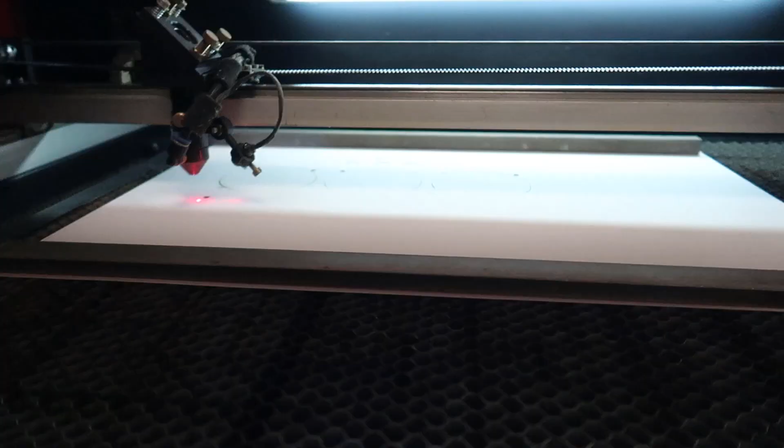On this episode of For Fun Flyer, the installation of the old and designing and test cutting of new cockpit panels, doing some investigation and changing the wingtip lights to LEDs.

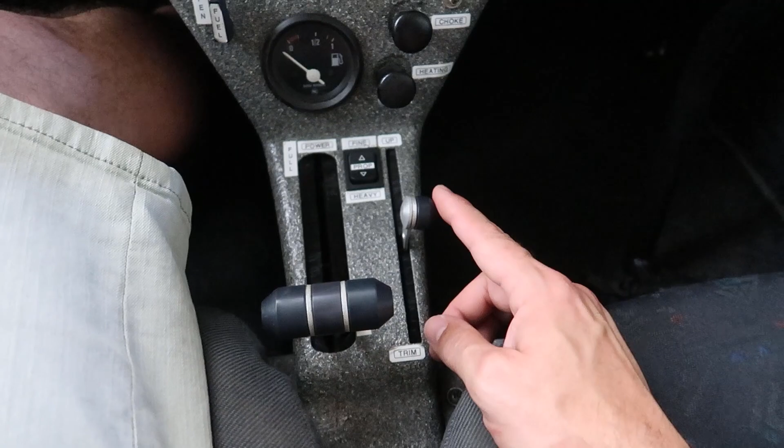And over here you have the lower section of the middle console with of course the throttle, the elevator trim, the prop pitch adjustment switch. But since the original variable prop is replaced by a fixed pitch propeller, it's no use anymore. So I'll have to figure out what I'll do with this spot inside the midsection. And you've got the choke and the control for the heating. Well, that's basically it.

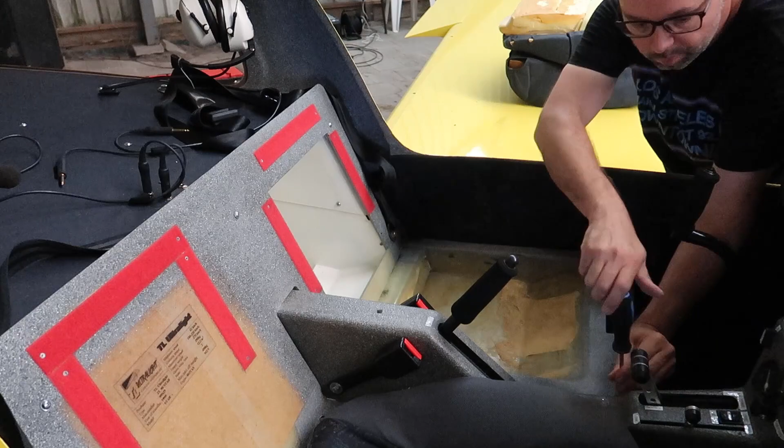So I removed the seating and the back seat. I always wondered where the high voltage part of the strobe and navigation lights were tucked away in this plane. But now I know. So I'll replace my lights with LED. So this all can go.

And what I'm actually looking for is a way to get inside to the headset connectors, because I purchased two A20 Bose headsets and they don't work, but that all has to do with how the headset connector in the chassis is connected. So I uninstalled the headset connectors from the chassis of the plane, and it's just as I suspected. They wired via a little wire bridge, let me show you on the connector, the ring with the tip of the connector.

So this is called the sleeve, this is called the ring, and this is called the tip. And with a stereo headphone jack, that doesn't matter, right? So if you connect it to either that one or that one, if it's a mono headset, it will work. But I got just the standard GA mono connector. And when this is connected with this, with a mono connector, the ring isn't there. So it's connected to the ground.

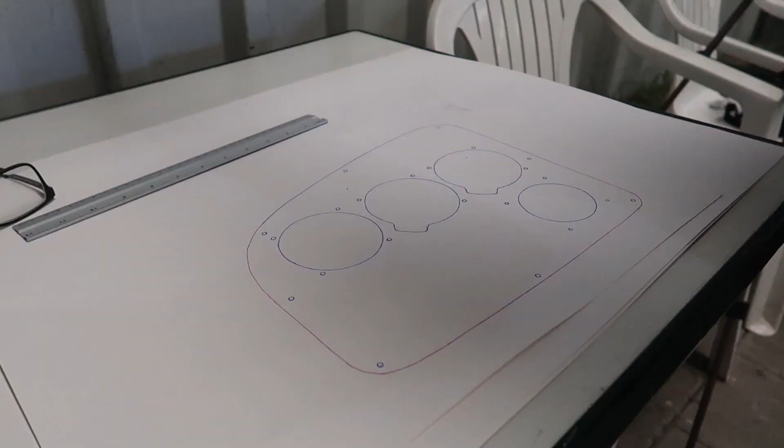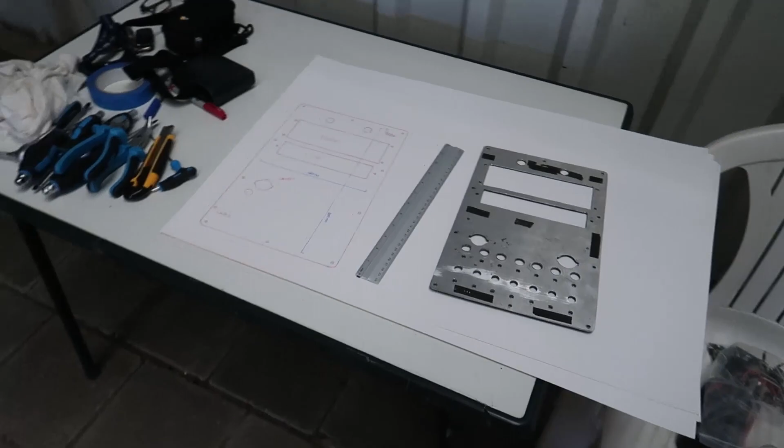So this is the piece and these are the traces. So now I have a nice flat drawing of the shape of the cockpit panel. So the next step is to scan it into a computer to vectorize it. The whole setup of the new panel will be different, but I have at least the shapes that worked in the previous original setup. So let's do the rest of them and see how that evolves.

So another day and another step in the process of making some new cockpit panels. So the couple of first steps you witnessed inside the hangar. I traced the old panels onto a piece of paper. I've scanned those drawings on my business copier and scanner. And after that, I'll walk you through a couple of steps of the complete process.

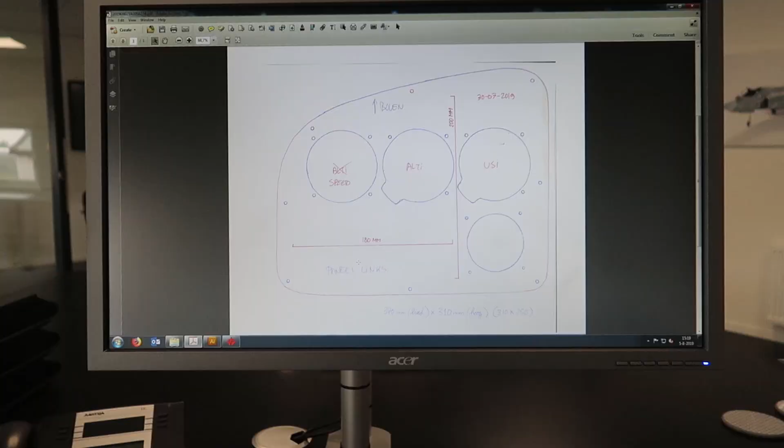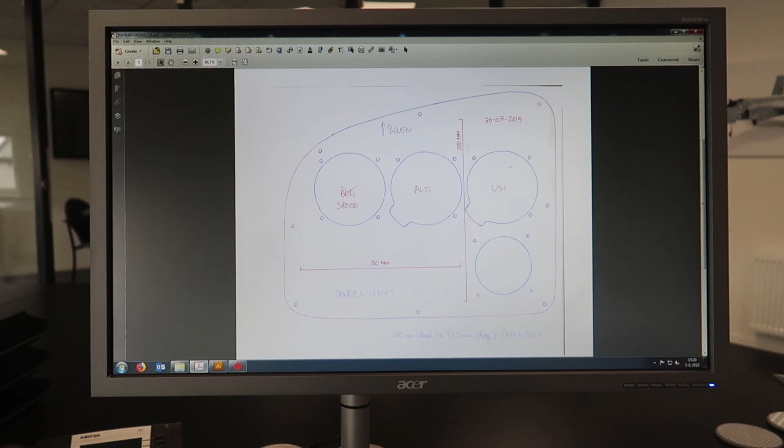So the first thing I did after I scanned the shapes of the cockpit panels, after I traced them onto a piece of paper, was check the scale of the scans. So I drew a line in the real life scenario with a certain measurement to it, to check if on both the X and the Y axis the scan was exactly to scale. So that is corrected in this PDF.

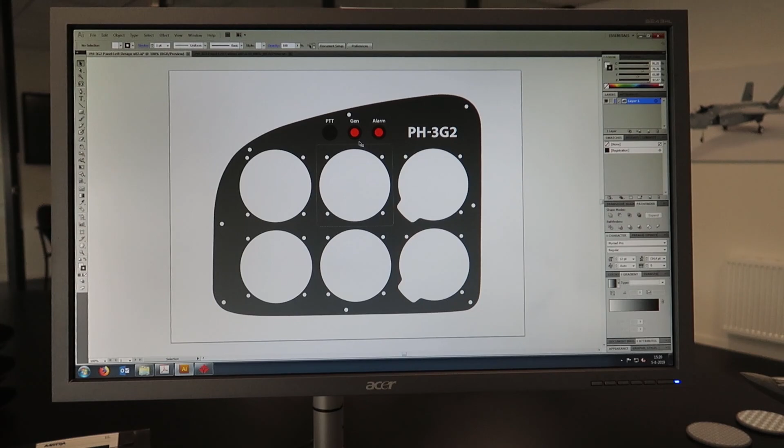After that I traced the PDF into a vector type of drawing, and as you can see here I did some GUI designing of all the buttons and instruments where they should be put on the new panels, etc. So well, I was pretty satisfied about this setup.

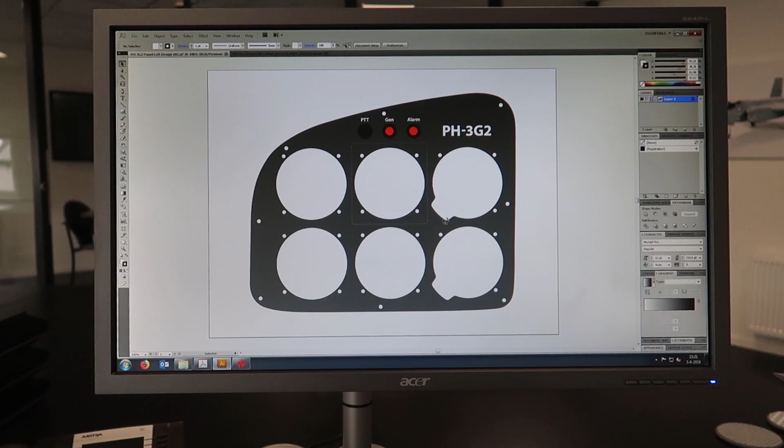Here we'll have the speed indicator, the Garmin G5 EFIS, altimeter, vertical speed indicator, an info device. I'll tell you more about that instrument later on. And here we've got a slip indicator. So it's not your completely standard six-pack, but pretty close to it.

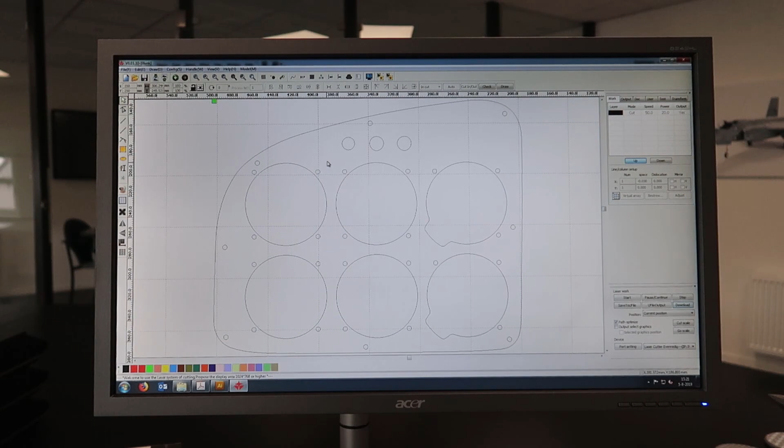And the next step after that is to just leave the trace, which is ready to be cut out of carbon sheet. But I'll first make a couple of test pieces on some cardboard so I can physically test the shape and geometry in the airplane. So that's up next. If you're wondering exactly where I'm going to cut out the test shapes of the cockpit panels,

At which company that will be? Well, that will be my own company. I'm a small business owner and I'm an engineer of all sorts, so I do software engineering, electronics engineering, prototyping, product design, etc. So I've got a couple of sophisticated machines where I can do some prototyping, and one of those machines is actually a laser cutter. Well, let me just show you.

It's way better. So welcome to my little maker space, and here's the machine I just spoke about. It's a 60 watt CO2 laser cutter, and it allows me to cut on most materials up to about half an inch of acrylic. Watch this.

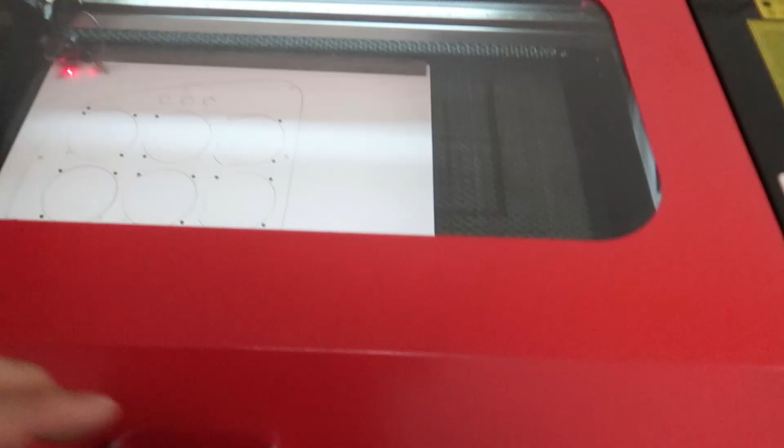Pretty awesome, huh? This never gets old. Seeing something getting cut out of some sort of material via laser cutter is just always fun. So when the smoke clears from the laser cutter, I can access the part I just cut out, and as you can see, it's just really thin paper, or thick paper and thin cardboard, and there you have it. The shape I just drew in the computer, and this will be the exact shape and dimension of the definitive cockpit panel. So that's pretty awesome.

Since I switched on the laser cutter, I decided to cut out the adapter plates for my LED wingtips too. So the wingtip lights that are on my airplane right now are from Whelen, if I pronounce it correctly, and I'll replace those for some LED lights of Aveo Lights. It's a small Polish company that produces outstanding wingtip and other aircraft lights in LED, with a huge variety of lights. And so I have to make an adapter plate to fit on the holes and the space on my wingtip as the lights I have right now. And they have to be able to house the new lights on them. So I'll show you in a couple of seconds what the shape looks like.

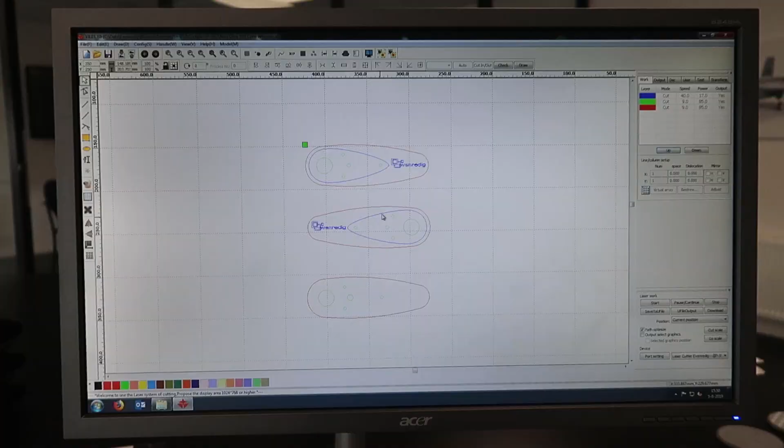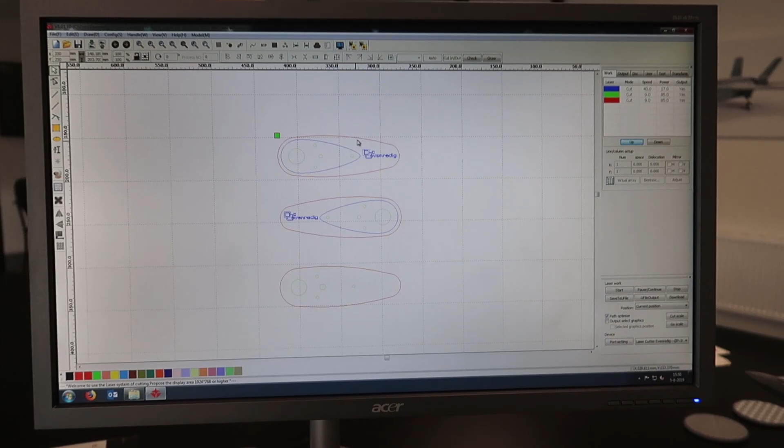So here you have it, the shape of the adapter plate. The red outline is the outline of the adapter plate. The blue line right here is the shape of the new LED lights, and these are some mounting holes and wire holes for the LED lights. So basically this light will attach to this plate, and that will attach to the whole wingtip and cover the complete surface of the original lights that are on my airplane right now.

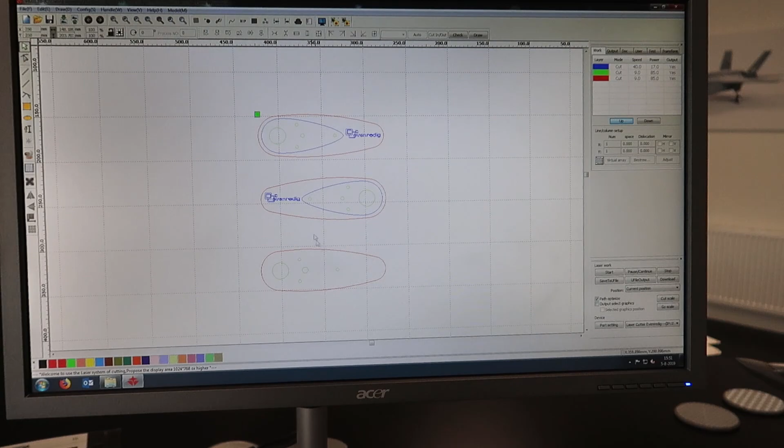And it will be a sandwich of two layers. So this is the top layer, this is the bottom layer holding the nut, the mounting nut for the new LED lights. So I'll make two of those and one separate of those, because my company logo has to be readable, right? So that's why I split the designs of those two. So, well, let's throw it onto the laser cutter and see what comes out.

So for the adapter plates for my LED lights, I use acrylic, as I said before, because I can laser cut it myself. And I've got this acrylic, I don't know if the camera is showing right now, but it's reflective. It's a silverish kind of plastic, which allows a better reflection of the light that will be emitted by the LED lights on the wingtips. So I think it's a perfect candidate for this application. I think I can squeeze out two complete sets. So let's see how that works out.

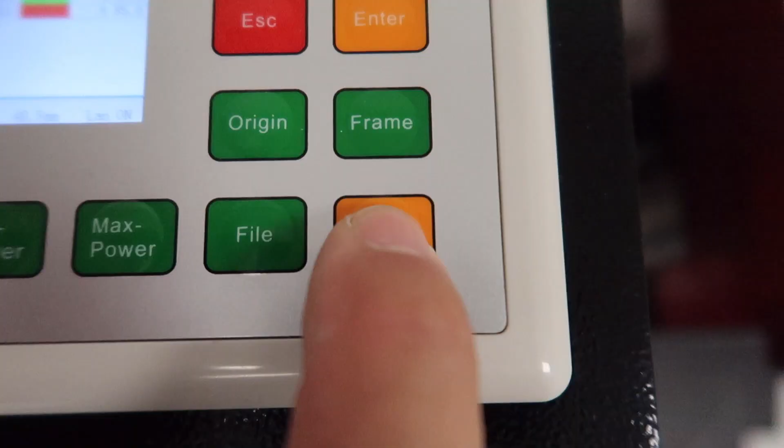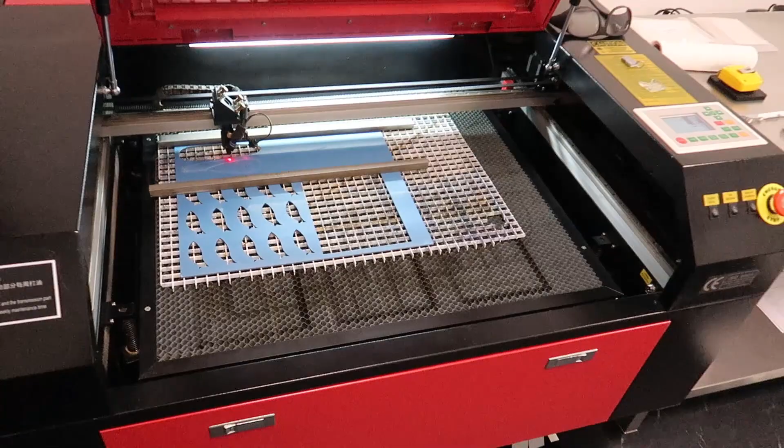So the laser cutting is finished. I've got some parts laying on my desk right now, the paper cutouts as I showed you in a video previously, and I made the adapter plates for my LED lights. So as I showed you on the drawing, this is the part where the new LED lights will be screwed on, and this complete sandwich is glued together. So let me show you right here.

It's a sandwich of 2 layers of acrylic, and that's because the new LED light is connected via this hole in the middle right here. And if I show you the back side of it, you'll see the cutout hexagonal shape for the nut. So the nut will be glued in here as well. So once this plate is installed on the wingtip, you can just screw and unscrew the LED lights with a nice M5 metric 5mm bolt. So that's basically how this is developed. So all I have to do right now is to glue those parts together, and I've got a complete adapter plate from the current Whelen to Aveo LED wingtip lights.